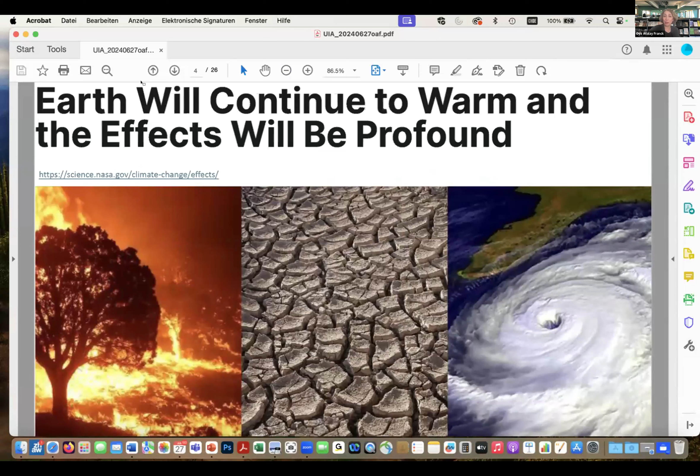Now? Okay, yes. So these were the tremendous challenges that we have. The 2 key issues that I'm going to talk about: the Earth continuing to warm and its effects being so profound, and our global reports calling for accelerated decarbonization of the building sector. So these were the topics that I was talking about. Now we're already in the solution seeking.

Well, as educators and professionals, taking our duties seriously and trying to actively contribute to expand our knowledge and tools to fight climate change. I think the RIBA climate guide for professionals and for the broader community, as well as the extensive research on pedagogy and guidelines developed by scholars from Finland, Denmark, and the UK are just 2 examples in finding solutions for these effects and overall helping improve sustainability, with which you may be already quite familiar.

As teachers and researchers, administrators, professional practitioners, we must find solutions for society's biggest problems where the built infrastructure is concerned. Embrace the potentials of critical developments, develop further strategies and put them into action. Improve the health of the building ecosystem with good building practices, and help society not only survive the existing crisis, but also adapt, to help it become more resilient and to raise the living standards.

As schools of architecture, we are also responsible for developing the best practices of pedagogies. We educate our students fit for the professional workplace today and tomorrow. We do research needed for advancing our knowledge, technology, and for developing the discipline, its discourse, as well as develop effective solution strategies for professional practice. As well, we provide continuing education for the graduates and all professionals to keep up to date, and, very important and central, most of all, to empower the next generations for their huge tasks in transforming the challenges into chances.

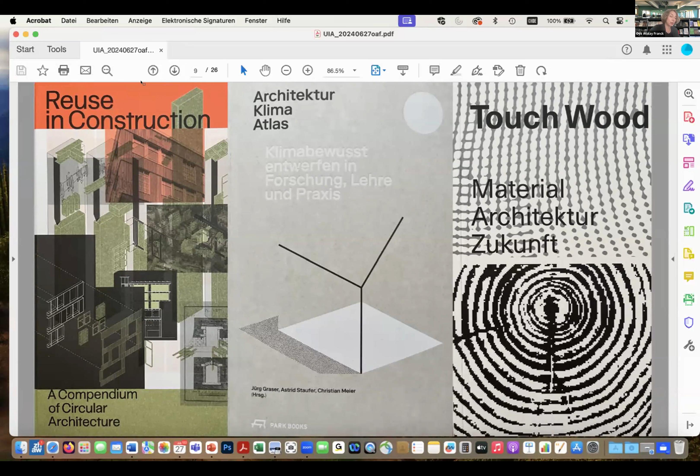So how to translate these goals into daily practice at an architecture school? The topics we are currently addressing in my school, but also in many others in Europe, in research and teaching, as well as in continuing education, are exploring many different modes of reuse in construction, thus improving circularity in architecture and building processes, working with hands-on practice and research-based data, but also through the lens of building history and culture, developing climate-conscious design and research, teaching and practice, building with alternative materials, as well as developing the conventional ones further, for instance, working with new wood technologies.

Also tackling the challenges, thinking radically from the early stages of design, how to reduce the energy consumption and CO2 emissions in building, developing new strategies in landscape and cityscape to approach architecture with completely different lenses. These topics are extensively researched and fully integrated into teaching, especially in the design studio.

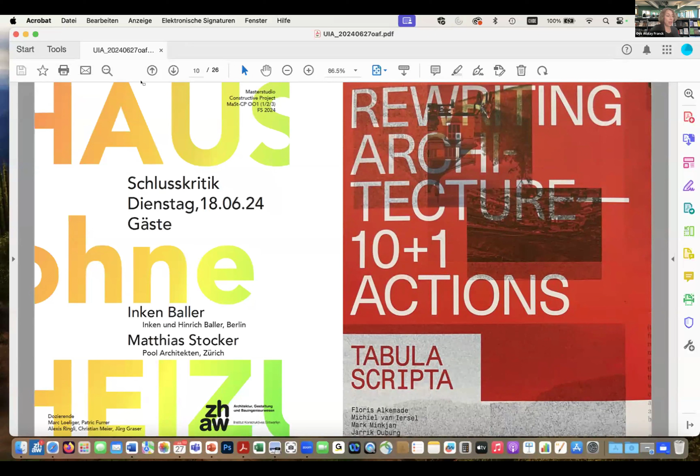The questions are tackled further in the form of research by design. The purpose is to develop new methodologies for addressing the tasks, as also happens in professional practice, in interdisciplinary groups.

Our students are committed. They know that they are part of a new paradigm shift, and they are the agents of transformation. The topics they choose freely for their thesis work are impressive, and at the center of their search is always the aim to reach good architecture.

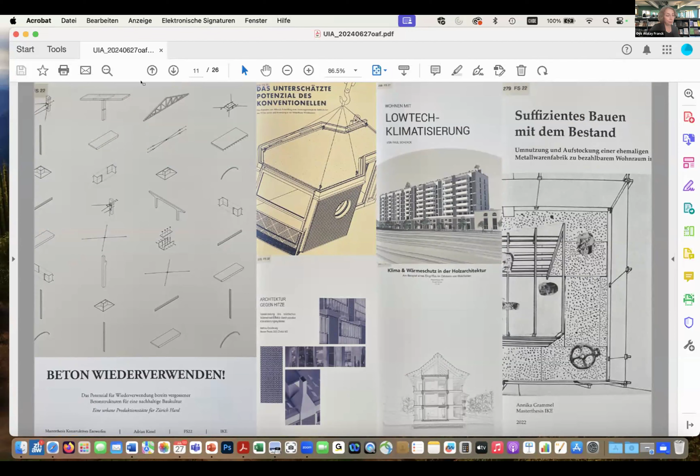The European Schools of Architecture get together annually, focusing on topics that oscillate between global and local. We have been repeatedly addressing as schools in recent conferences curriculum for climate agency, design in action, but also new ways of sufficiency. You're very welcome to connect with us in Münster 2024, end of August.

This brings me to the second topic, which impacts the schools and the practice: AI and digitization, where we are even more overwhelmed. The change and developments in the sector are extremely rapid, as known, and highly specialized. What is new today is literally passé tomorrow. How do we keep up with this pace?

How will our current teaching methods adapt? Are we already passé? How will our craftsmanship be in a few years? And do we, as teachers, have the right competences and tools to implement what is necessary into our educational practices?

Traditionally, architectural education depends a lot on analog methods, producing artifacts and in-person communication throughout the design, but also in the practice of construction processes.

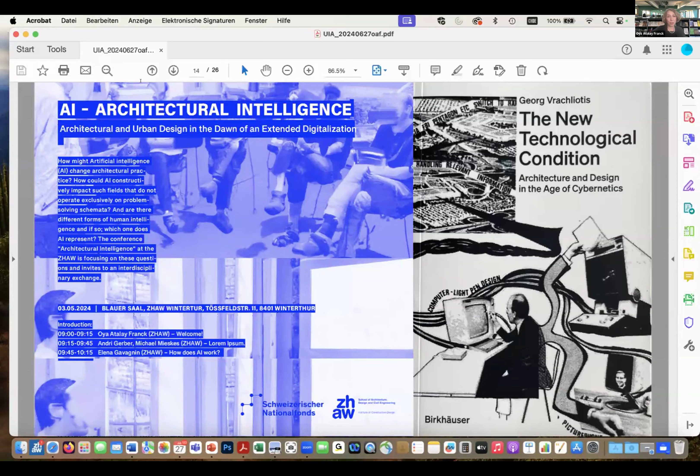Policies, this is the third P you have in the session and for this series: policy to practice to pedagogy. Policies can help. Since 2021, the new European Bauhaus initiative of the EU Commission has been a catalyzer.

It has been a catalyzer to forge alliances and collaborations, to make best practices visible, to develop interdisciplinary methodologies and skills, and to expand the implementation of innovation through digitization to push forward sustainability for scarcity.

This happens especially through extensive collaborative projects such as DigiNet, Circular Bio-Based Europe, or Craft Creating Actionable Futures, bringing multi-stakeholders together. I'm proud to say that the architecture schools have a central role in all these innovative projects. They are partners.

I'm coming to two fundamental principles which I believe are indispensable for the future: designing the life cycle of buildings, and educating the citizen architect. We need a new mindset, for architecture, landscape, urban planning, construction, and management.

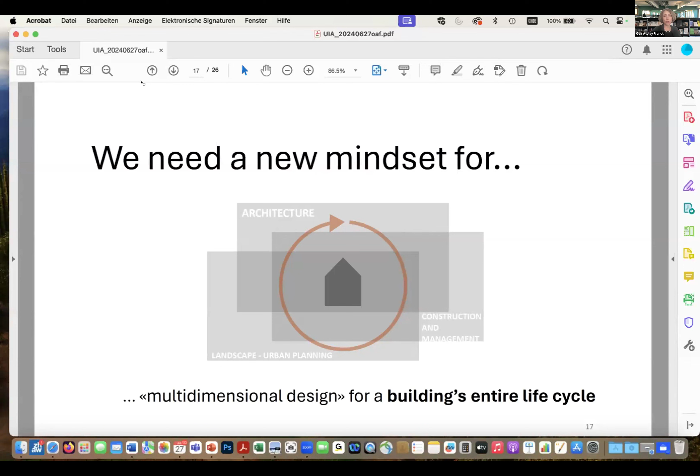We have to focus on multidimensional design. We have to aim for buildings' entire life cycle. The goal must be high building culture and quality of life.

Educating the citizen architect is also fundamental. We have to look for citizenship in education to form critical, informed, empathic, socially active individuals. The architectural education must be a field of critical process of inquiry, a vehicle to raise social awareness, a tool for collective imagination.

And we have to focus on the challenges while creating conditions for students and educators to locally engage as active citizens in their communities.

The future depends on interdisciplinary collaboration. We have to reach out, connect to other disciplines. We have to connect to other organizations of education, to professional practice, and to politicians.

For instance, the 2022 International Conference in Florida on Resilient City: Physical, Social, Economic Perspectives, or recently in May in Aarhus, Denmark, Architecture into the Unknown, also looking at new modes of production and business models, as well as the work together with American Collegiate Schools of Architecture, practice of teaching, teaching of practice, as mentioned before, educating the citizen architect.

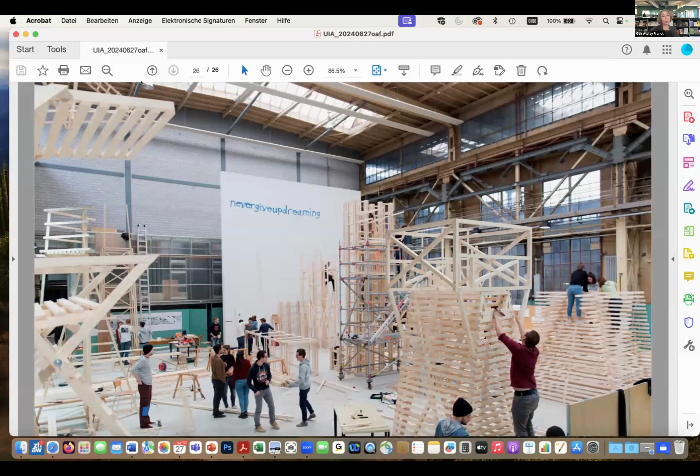I'd like to finish with a motto of my school. This is a graffiti a student of ours had put on our wall. The school's administration had tried to wipe it up several times, but we are resilient. Never give up dreaming, but not to forget, for the dreams to come true, we need a plan and we have to act. I hope you can share this with me as well. Thank you very much.

Selma? You're still mute. Thank you very much. Apologies, technologies. Thank you very much, Oya. Very, very inspiring, uplifting conclusions and solutions proposed.

Shall we now move on to our next speaker? I note there was some correspondence, and I hope that is sorted between Miyawati and a few panelists who were not on the same link. But if that is the case, may I now invite Dr. Sumayah Al-Solaiman from Saudi Arabia, our region 2, who is Chief Executive of the Architecture and Design Commission at the Ministry of Culture. So Dr. Sumayah, if you can hear me, please take the floor. So far, she didn't get the link yet somehow. Okay, if we can move into the second speaker, the following speaker, and then. Okay, no, okay, she's here. Okay, thank you very, yeah, there were few of them. I've sent an email to Miyawati and I've sent a link, but it's in this panel, I realize, so maybe not everybody gets it. So hopefully that's resolved.

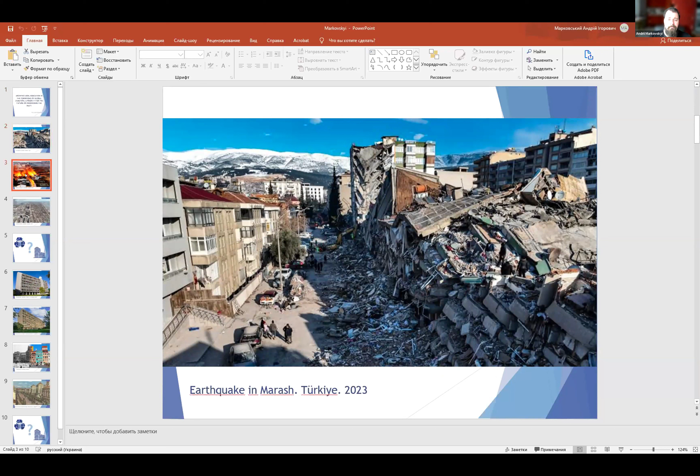In conditions of global challenges and existential threats, when not individual structures are destroyed but hundreds, sometimes thousands of buildings, maybe full cities, agglomerations, or regions, the question arises: what exactly should architectural education focus on when preparing future specialists? Should we focus on preservation of historical heritage, reconstruction, and in the case of loss, reconstruction, or support of sustainable development?

Or on the contrary, should we focus on modern technologies and materials that allow us to quickly and qualifiedly create new comfortable housing units for people, minimize the number of forced refugees, create better conditions for them, and make it at lower financial cost? Should architectural education train narrow profile specialists or generalists?

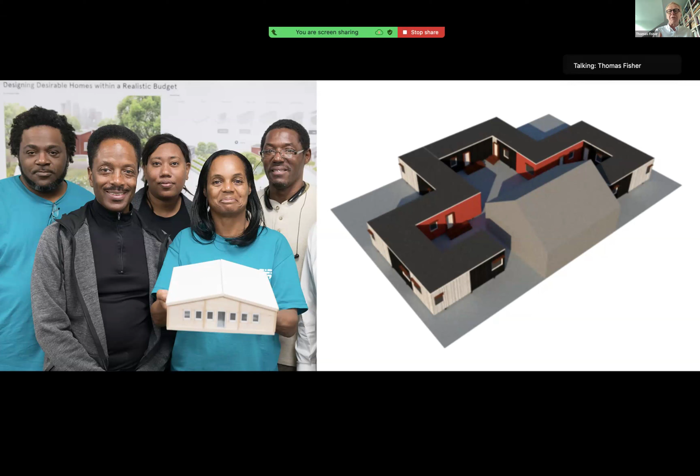And so again, this is an example where we're not only designing a physical thing, in this case housing, but we're redesigning the systems that enable that housing to happen. It's also about building on the assets of communities and, again, engaging the very people who are part of the system.

So it's recognizing there are many different forms of capital. There's not just money, there's also human capital, natural capital. It's accepting the wisdom of crowds. It's being open to the ideas of people who might not be designers, but often have diverse perspectives. And it's working both bottom up and top down.

And one of the things we've realized that is a value that we have to offer is that many people recognize that we as a field are very good at paradigm shifting, at developing new ideas, asking kind of fundamental questions about why things are the way they are. We do a lot of work in communities where we build on their assets. These are often communities that are struggling with depopulation or housing issues.

This is an example of a community along the Mississippi River in the middle of the United States that needed to attract new population. And so we worked with them in terms of the natural landscape that would attract new people. We actually worked with our Army Corps of Engineers who dredged the Mississippi River and had them essentially show how they could put that dredge material to create a new park and a new set of opportunities for new housing in this community.

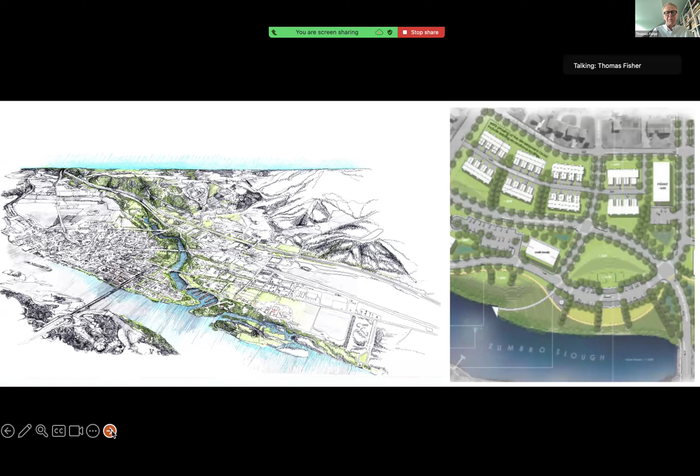So again, this work frequently straddles redesigning the system, in this case how the Army Corps of Engineers handles their dredge material, and physical design, in this case an urban design strategy for this town. A lot of this involves what we call relational curiosity, really looking at the kind of self-organizing ways in which the engagement of individuals and communities can create new kinds of systems and services.

As many of us know, working in the design of buildings, the solution often lies at a scale different from that of the problem, and solutions are very situational and culturally specific. And these are characteristics that others who are not from the design field don't often understand. There are many people in the business community, for example, who are calling themselves service designers, but they have never really been trained as designers. And so they often don't understand the kind of nuanced way in which design works.

We, for example, have been working with the Centers for Disease Control and Prevention, teaching some of the world's best public health physicians how to use design as a way to respond more creatively to global disease. This is an example of some of the workshops that we've been leading in this area, where they recognize that to solve some of the major problems, they need to be more innovative and to think literally outside the box in terms of how to address global problems.

This is a very action-oriented way of working. We tend not to use the word design thinking because this is not about thinking, it's about doing. And a lot of what we find ourselves doing is doing to think. In other words, just as we work as architects, we do drawings, we build models in order to understand a problem. We do the same when we're doing this service design work. We're learning quickly from failures, as we do in any design process.

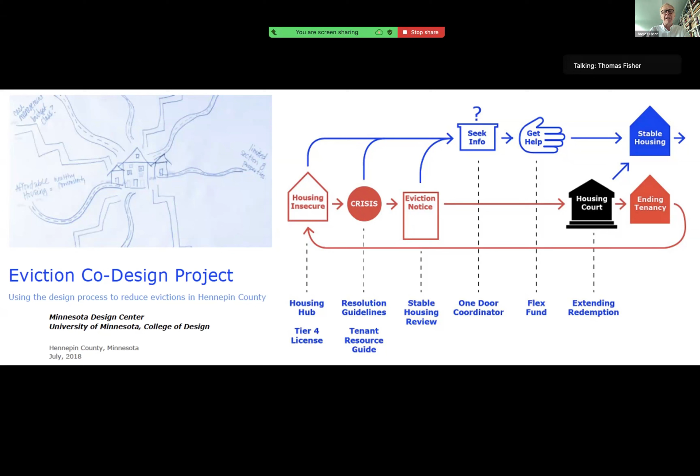And if we get to a point where we can teach our students how to think and work in these ways without being so wedded to a single outcome, which is the design of a building, we will find that our students have more opportunities than they could ever imagine. So with that, I will stop. Thank you.

Thank you very much, Thomas. That is very uplifting, and I love the buzzwords about solution architect, break the boundaries, and vary between skills. So skills transferability and adaptability, paradigm shifts. That is all really what the profession and education needs to embrace, and with confidence. And thank you for giving us that confidence and examples of very varied applications of that type of approach.

So on that, let us move now to another region. We go down south to Australia. Lindy Osborne Burton is our next speaker. She is an accomplished architect, educator, and researcher, and interested in advancing the profession of architecture. She is also an associate professor of architecture at Queensland University of Technology. So Lindy, please, the floor is yours.

And I think we still have somebody's screen. I'm not sure. Is this Lindy trying to enter or? Yeah. Yes, it's mine. Okay, thank you. Can you hear me? Yes. Thank you very much for that wonderful and very warm introduction.

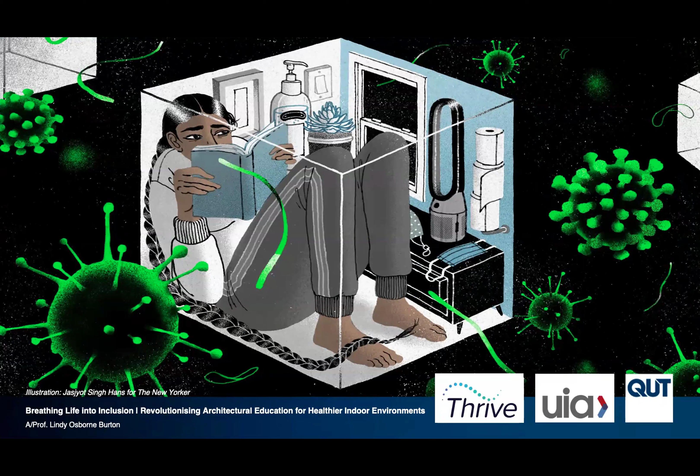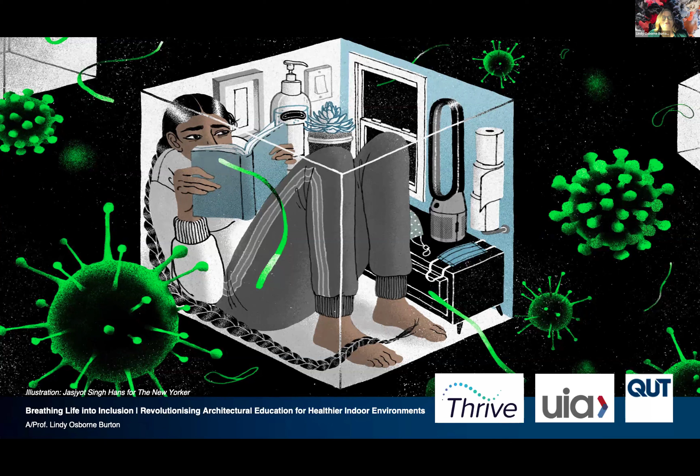So I want you to start with just imagining a future where really every indoor breath that we take within buildings promotes health and inclusivity. And I argue that to realize this, we must revolutionize architectural education globally. As educators, we need to equip tomorrow's architects to create environments that prioritize occupant health and well-being, and not just focus on aesthetics and form, which, if you're like me, I'm sure is all you ever see in your design studios from your students.

So when we think about indoor environmental quality, and especially air quality, it's really often overlooked in our curricula and in our focus. And I argue that the air that we breathe profoundly affects our health and our quality of life, and that we really must teach our students to be mindful of vulnerable people, particularly those who live with chronic health conditions. So while, at least in Australia, outdoor air is fairly heavily regulated, indoor air remains largely unmonitored. And I believe that this gap in our teaching demands urgent attention.

So my question to you is, how can we design buildings that can help us to thrive? How can we challenge our students to rethink architectural design by putting health at the forefront? Our future curriculum must balance energy efficiency with occupant well-being. And natural and hybrid ventilation really should be core components of our teaching. I argue that we should inspire our students to blur the lines between indoor and outdoor environments, drawing lessons from vernacular architecture, and particularly from areas within the global south, which I think are very often overlooked in our curriculum, certainly in Australia.

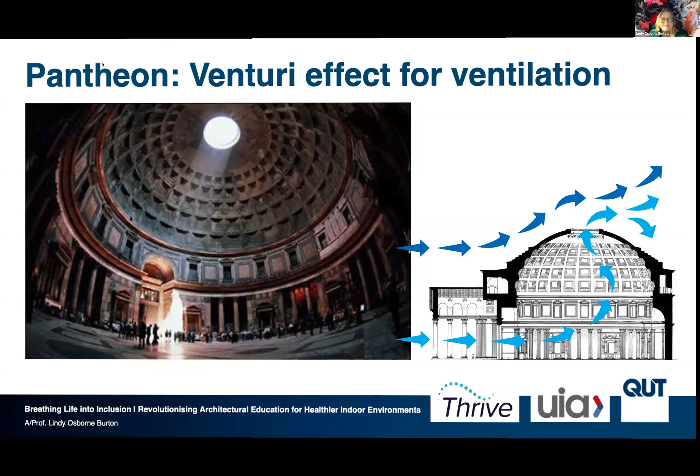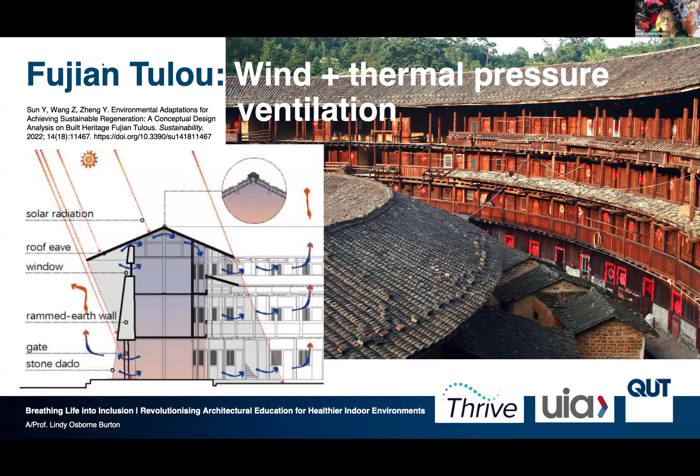So while historical examples are obviously very valuable, we do have to teach how architectural solutions for air quality have evolved and where we're situated currently. Our curriculum needs to bridge those ancient wisdoms with our knowledge of contemporary technologies. I encourage you to encourage our students to innovate and draw inspiration from both the old and the new.

So currently, in most buildings in developed areas, particularly in areas like Australia, where I'm presenting from, we treat air merely as a control medium, adding outdoor air only to meet the minimum requirements regulated by legislation. And I really believe that we've got to challenge our future architects to design for true health and comfort, emphasizing that a building's success is not just about its appearance, but more about how it functions for those who occupy, live in and use the buildings.

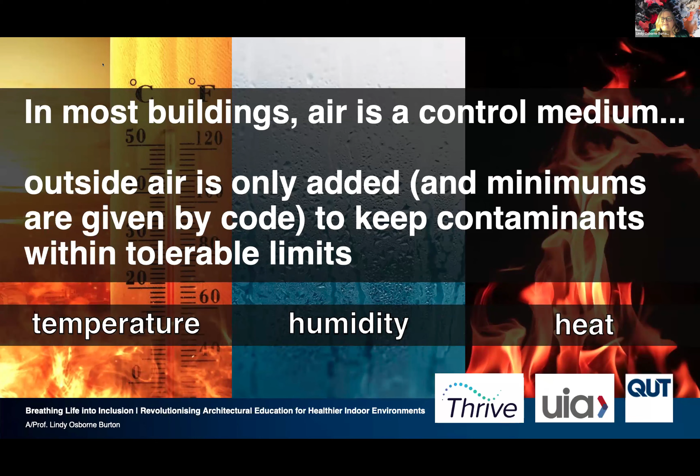So when teaching about ventilation, we really must stress its role in infection control, particularly coming out of the pandemic, which I think is hopefully still front of mind for everyone in the Zoom call today. Natural ventilation offers cost-effective solutions, but we know that it also comes with challenges in contemporary infrastructure. The solution is not simply about opening a window.

Our students need to balance their ideals around designing for energy efficiency with concerns about health, especially in our post-pandemic world. I'm of the view that we've gone so far in terms of concerns about energy efficiency that it's actually at odds with and has become detrimental to the health of building occupants. So it's important to not forget the work and the legacy that was left behind by Florence Nightingale.

165 years ago, she was advocating for ventilation to reduce cross-infection. Now, she wasn't an architect, she was a nurse. And her emphasis on fresh air still remains relevant to this day, and her work is still published and referenced. So by including such perspectives, and I dare say, thinking of multidisciplinary perspectives, we can inspire students to pioneer health-focused design, rather than focusing only on the views and opinions that come from architects.

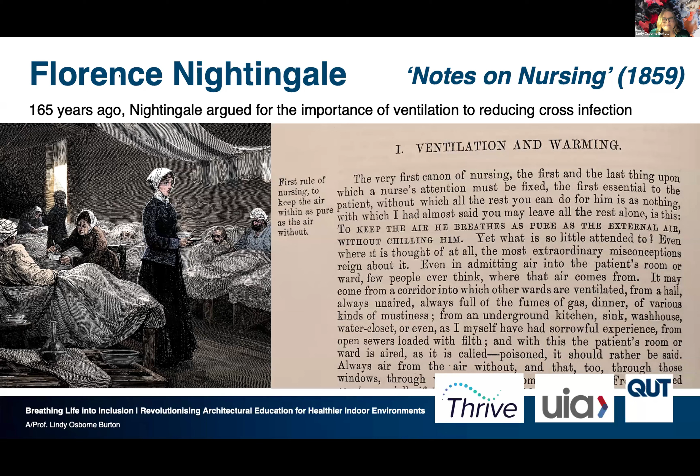So Nightingale's work was really quite profound in that she provided specific ventilation recommendations. And we should encourage this level of detail in our students, teaching them to be proactive in improving indoor air quality, just as they are when it comes to considering spatial requirements or aesthetic considerations or arguments about building form or context.

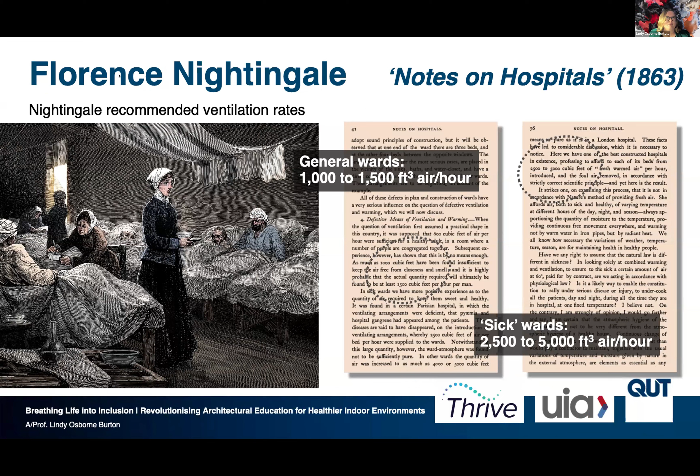Now, Nightingale's solutions for cold and boisterous weather demonstrate crucial adaptability. I think it's important that we prepare students to design for various climates and cultures, but always prioritizing occupant health. The future of architecture lies in this flexible, health-focused thinking.

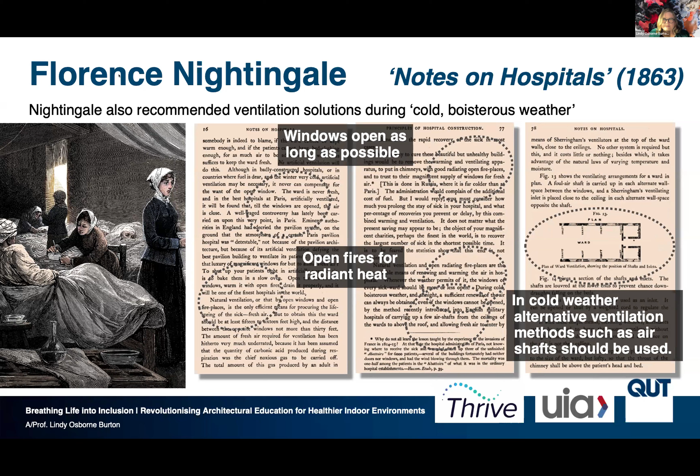We often associate air pollution with outdoor spaces. At least I am speaking on behalf of the Australian cohort. But indoor air quality is equally as important. We know that indoor air can be more than twice as polluted as outdoor air. With people spending a lot more time indoors, we must train students to consider air quality as fundamental to design and not something that is added on as an afterthought.

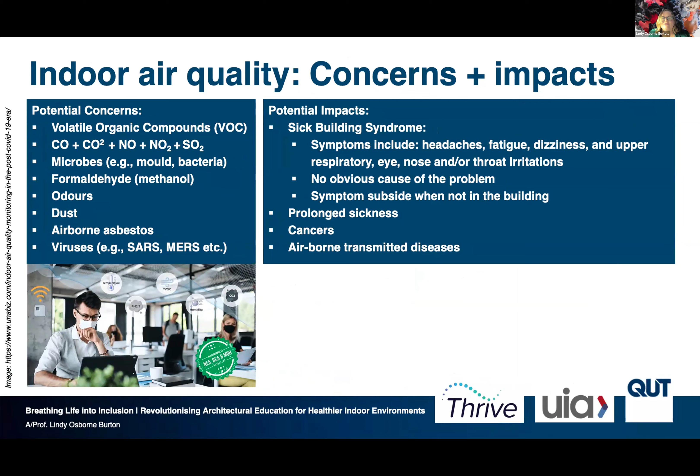Now, our future and emerging architects also need to understand the potential indoor air pollutants and their impacts. And these range from VOCs to viruses. You'll see on the slide, I've named just a few. But they're all design considerations. And we should be teaching about sick building syndrome and its prevention through health-focused design. Our students must grasp how their designs directly impact people's health and their well-being.

Now, despite the UIA declaring 2023 as the year of design for health, which, by the way, I was absolutely delighted that they did, many architectural curricula have been really slow to adapt. And I would argue as well, practice has been slow to adapt as well. And I believe that we must ask why and how we can actually change this. Our education must be more responsive to global health concerns and not in a tokenistic way.

So the UIA's initiative focused on designs that protect, develop, and restore health, acknowledging the interconnectedness of human, animal, and environmental health. This approach should be absolutely central to our teaching and training architects to create spaces that actively contribute to holistic health.

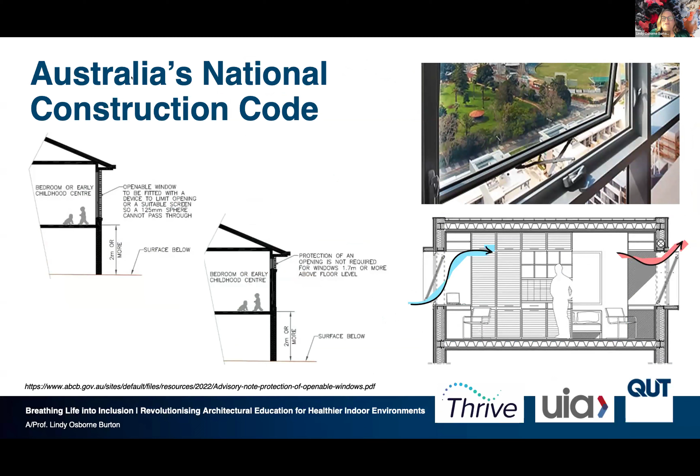Australia's National Construction Code has specific ventilation requirements, but these intersect with safety regulations which limit window openings. We need to teach students to question and to go beyond minimum standards, finding innovative ways to maximize ventilation while maintaining safety. The future of architecture, I believe, lies in this sort of creative problem solving.

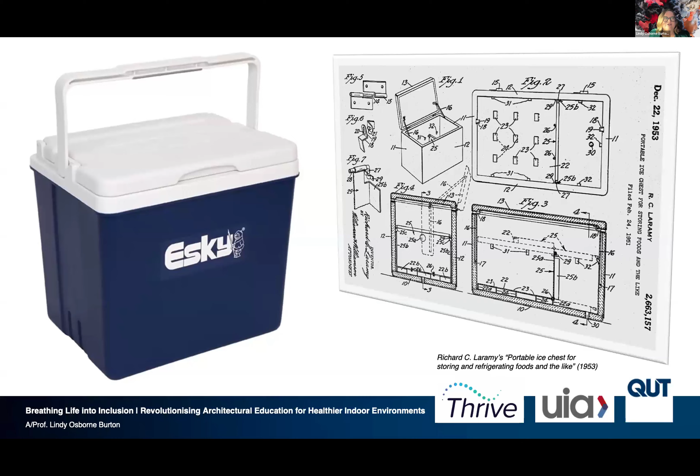So why is it that we just continue to design buildings that are like fully sealed eskies or chili bins or ice coolers or whatever they're called in your part of the world? Australia's National Construction Code effectively encourages this in order to comply with the energy regulations that are in place. And I believe that we should encourage students to challenge regulations, to seek inspiration in unexpected spaces, and to propose innovative solutions. The future of architectural education lies in creative cross-disciplinary thinking.

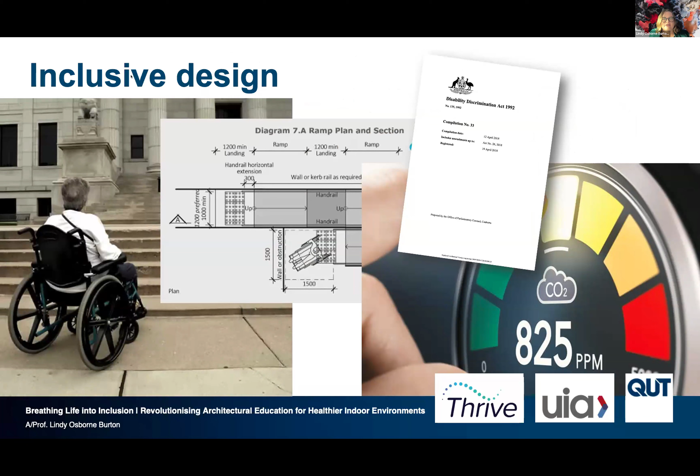So how can we make invisible disabilities visible in our designs? Air quality significantly impacts people with chronic health conditions. Carbon dioxide levels can indicate infection risk, and tomorrow's architects must understand the relationship between ventilation, carbon dioxide levels, and health risks. We need to broaden our students' understanding of inclusive design.

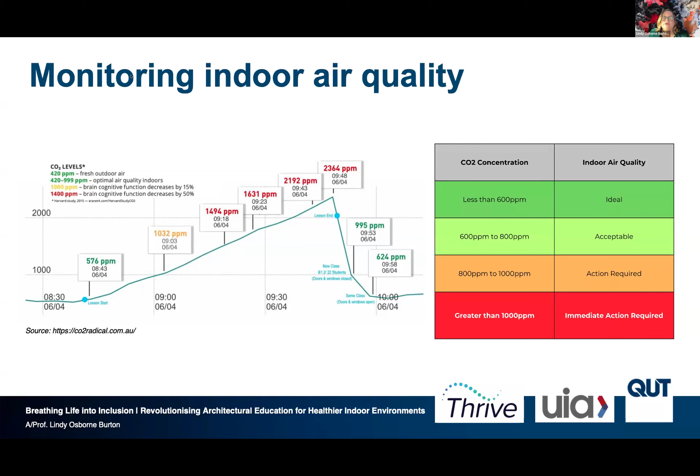Monitoring indoor air quality should be key in architectural design. Carbon dioxide levels can indicate air cleanliness and ventilation needs. Higher carbon dioxide levels increase infection risks, and we also know that they can dramatically affect cognition. So these issues, which have been heightened in our thinking since 2020, are still not widely recognized, exposing gaps in our approach to diversity and inclusion. We must teach students to integrate air quality monitoring into their designs.

Improving indoor air quality boosts health, productivity, and sustainability. We need to show students how good air quality design leads to multiple benefits. Tomorrow's architects should be able to argue a clear business case for healthier buildings, particularly when discussing this with their clients. It's crucial that we use available tools to make indoor spaces safer, healthier, and more accessible to all.

Since 2020, organizations like Australia's Safer Air Project, led by the formidable Plum Stone, are advocating for safe and inclusive indoor spaces. Accessibility and inclusion should be absolutely central to architectural education. Creating safe and healthy indoor environments is fundamental to our notions of inclusive design, and the future of architecture lies in this holistic approach. It's ironic that while we have legal requirements for physical accessibility and outdoor air quality in Australia, we lack similar legislation for monitoring indoor air quality in public spaces. We should encourage students to question these gaps and advocate for comprehensive health and safety standards in building design.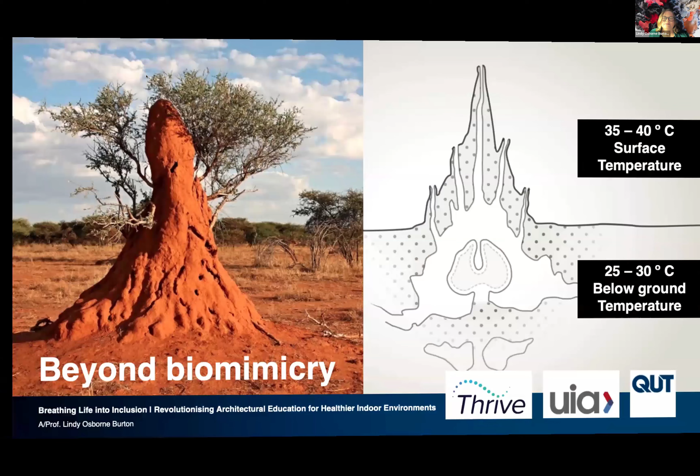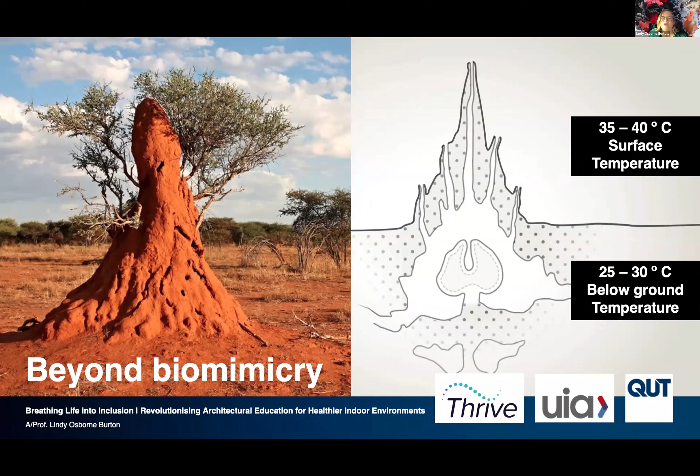So I'll put the question to you: what if buildings could breathe? Biomimicry offers exciting possibilities for living buildings that can self-ventilate and cool. The termite extended organism provides a model to move beyond biomimicry to truly alive buildings. We should introduce these concepts, encouraging students to look to nature for sustainable solutions, and understanding how our lungs work can provide valuable insights for building ventilation. We should encourage students to think of buildings as living, breathing entities—this interdisciplinary thinking is crucial for the future of architectural education.

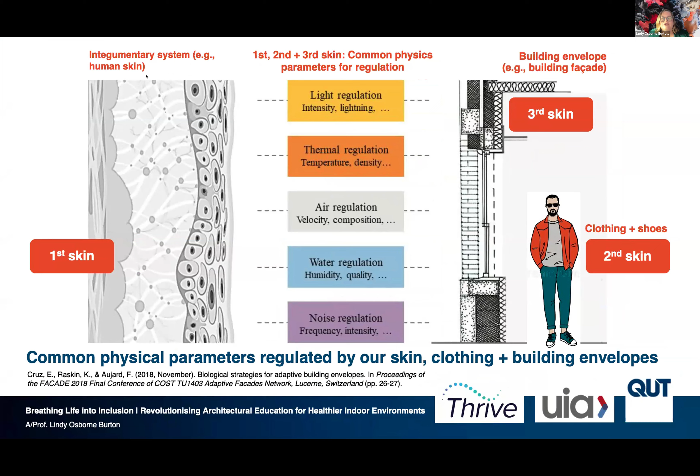There are also striking parallels between how our skin regulates temperature and how our clothing and building envelopes can do so. By encouraging students to think of buildings as extensions of the human beings that exist within them, this holistic thinking will help them design truly human-centered spaces and environments.

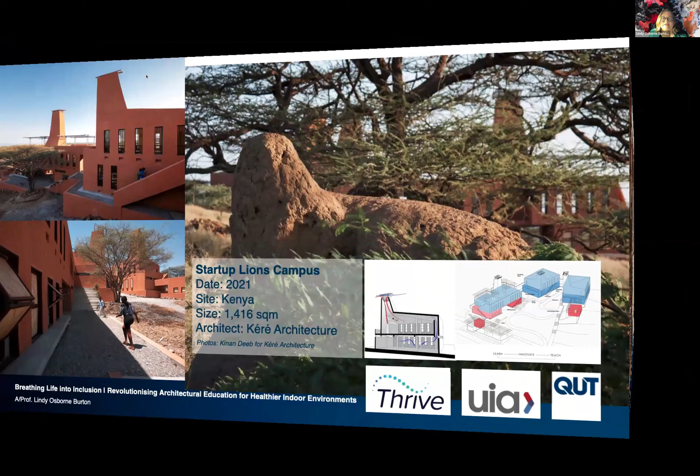Council House 2 in Australia exemplifies sustainable design innovation and practice. Similarly, the Startup Lions campus in Kenya shows how buildings can respond to their environment through local community collaboration and considering local climate, materials, and cultural context. The Las Tejedoras Center in Ecuador demonstrates how traditional techniques can be combined with contemporary design practice. These case studies show students what's possible when you bridge the past and the present and challenge the status quo.

By integrating local climate, contextual, and cultural knowledges, while simultaneously enhancing ventilation strategies to improve indoor air quality, we can empower the next generation to design truly inclusive spaces. We must expand our understanding of diversity, equity, inclusion, and belonging to encompass health and well-being. This comprehensive approach to human-centered design will elevate architecture's contribution to tackling global 21st century challenges.

Thank you so much for your attention. As we move forward, I want to challenge you to commit to breathing new life into architectural education by prioritizing health, well-being, and inclusivity at the front of our teaching, so we can transform not just our profession, but the built environment and society at large. The architects we train today will shape the world of tomorrow. Let's ensure they're equipped to create a healthier, more inclusive future for all. Thank you.

Thank you very much, Lindy, with that breath of fresh air and ventilation, but also the messages of learning from vernacular, looking at how we strike a balance between technologies and lessons of passive strategies that are there and perhaps more suitable to different climates. I couldn't agree more with the call to embrace health and well-being as an ultimate goal of any educational and practical approach. Thank you very much for that.

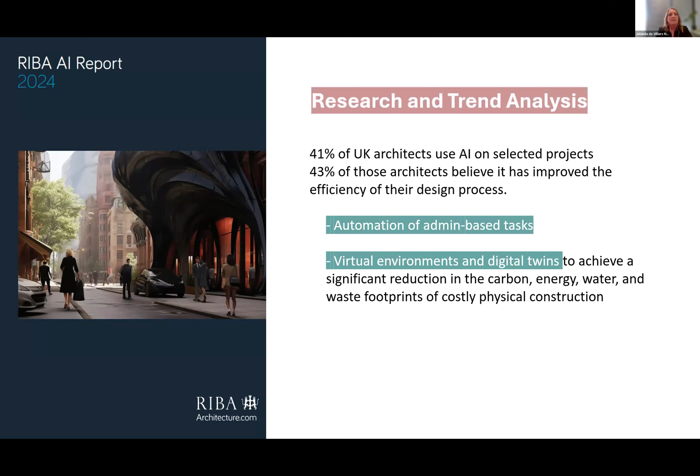Along the same lines as the RIBA report, which highlights both the potential benefits and risks of AI on architectural practice, Harvard professor Neil Leach describes the impact of AI on architectural education as both incredible and terrifying. This dichotomy arises largely because we have no clear vision of what the future holds or how quickly it will arrive.

Like architectural practice, higher education - a profession equally traditional and firmly rooted in established practices - is being challenged by AI. The rise of AI technologies is prompting a re-evaluation of conventional teaching methods and the role of educators, pushing institutions to adapt to a rapidly changing educational landscape, and in doing so, aiming to shape AI as a force for good.

Shortly after the release of ChatGPT 3.5 in November 2022, Professor Daniel Koehler of the architecture program at University of Texas at Austin wrote a bold piece titled Studying Architecture After AI. He argues that architects will need to find new ways to contribute to the profession, similar to what we've heard earlier today, and that new sets of skills are required - ones that can be used in conjunction with AI agents. According to Koehler, these AI agents or bots can also play a significant role in the education of architects by providing personalized support to a diverse body of students, meeting them according to their own needs, thereby expanding the role of the human design tutor.

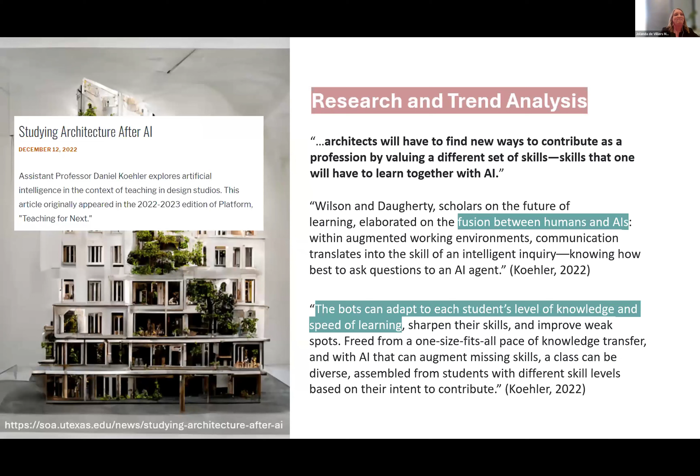When AI enhances human capabilities instead of competing with them, it creates what we call a cyborg or cybernetic organism. Imagine the implications for architecture education, where human tutors often struggle to properly engage with all their students, given the worsening staff-to-student ratios due to increasing student numbers and dwindling resources.

To help me imagine the change invited by Salama and Burton, I prompted GPT-4o. The prompt contains three things: a role, a clear goal, and instructions. The role of the AI in this case is a futurist. The goal is to use speculative futures to reimagine educating architects in an AGI-dominated age. The instructions are to write three short stories or narratives, each for a South African architecture student, trained to respectively conceptualize, communicate, and implement innovative and sustainable built environment designs. After each narrative, I asked DALL-E to give me a super realistic image of the student based on the narrative.

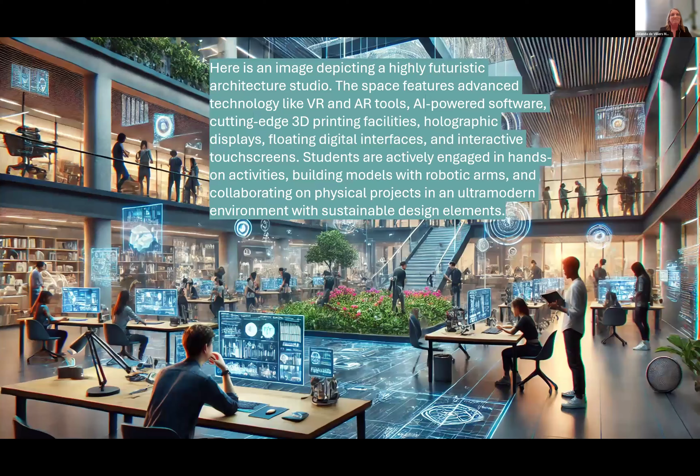Next, based on the narratives, I asked DALL-E to give me an image of what their studio looks like. The accompanying description reads: here is an image depicting a highly futuristic architecture studio. The space features advanced technology like VR and AR tools, AI-powered software, cutting-edge 3D printing facilities, holographic displays, floating digital interfaces, and interactive touchscreens. Students are actively engaged in hands-on activities, building models with robotic arms, and collaborating on physical projects in an ultra-modern environment with sustainable design elements. This was the first iteration.

Reflecting on the trends and narratives, I noticed that for each of the three architecture students, Tabu, Naledi, and Sipu, GPT-4 included an AGI assistant to help them conceptualize, communicate, and implement. Interestingly, these assistants were not present in the visualization of the studio space itself. Yet there's a steadily growing body of research focusing on AI assistants, also referred to as AI agents, virtual tutors, tutor bots, etc. Some authors argue that students value their availability, patience, and lack of perceived judgment.